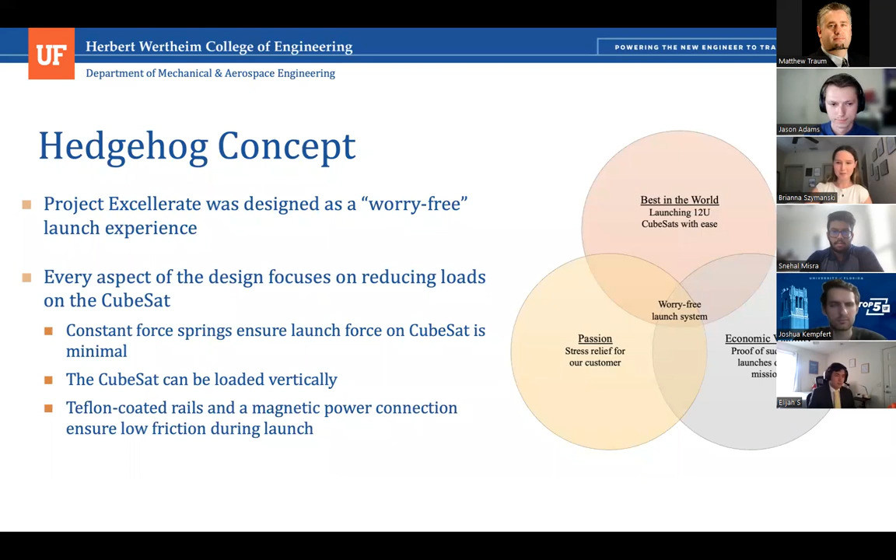Yeah, so a quick overview of our CSD. Our CSD houses a 12U CubeSat, utilizes a custom power and communication system to connect to ground, and also has our unique worry-free loading and launch mechanism. Right now, the overall mass of the system is just about 5 kilograms, a little bit under that.

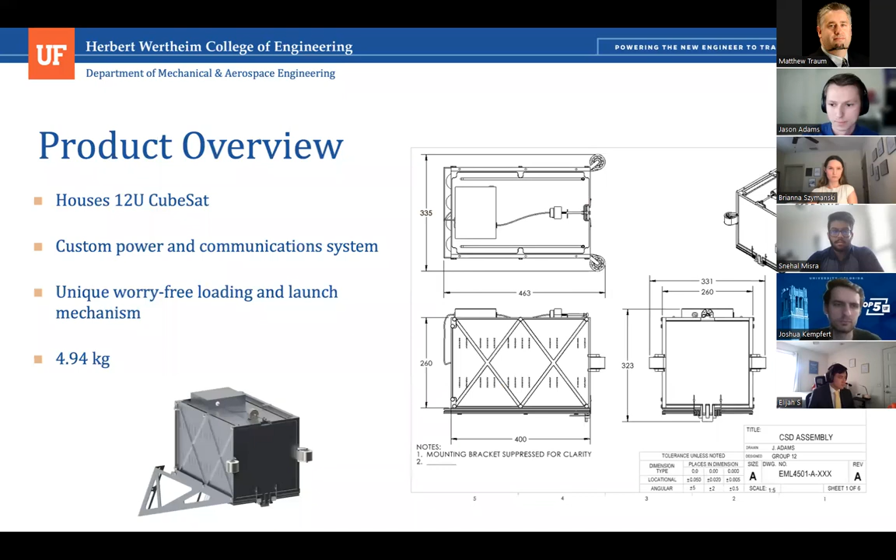So our housing, like I said, fits a 12U CubeSat. It's comprised of 5 plates of 7075 T6 aluminum. The housing's overall mass is about 2.5 kilograms, about half the mass of the entire CSD, and also accounts for liftoff and ascent venting to ensure that there aren't any extreme pressure differentials that can damage the CubeSat during launch.

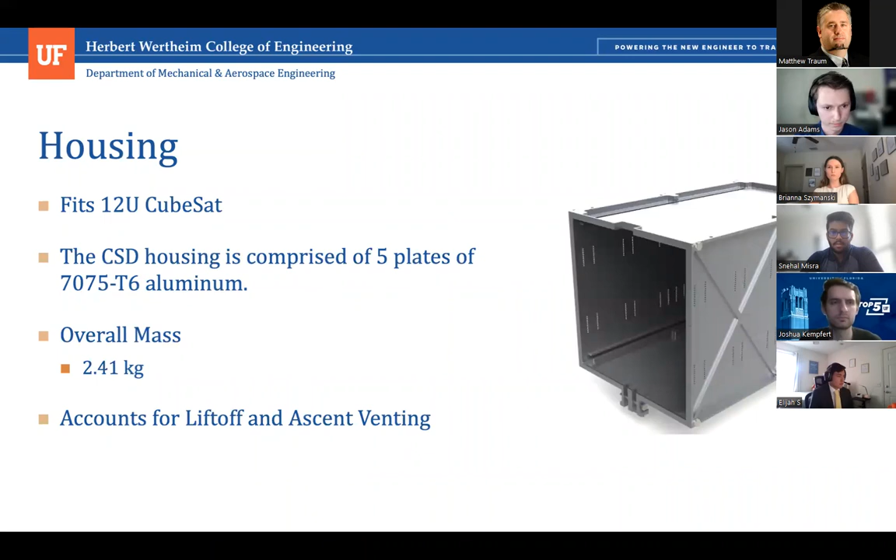Like I mentioned, we chose 7075 T6 aluminum for our housing, mostly for its high specific strength. 7075 is one of the highest publicly available alloys of aluminum. But when putting that next to other metals like titanium, magnesium, its cost is very, very low. And when putting that next to other materials with high specific properties like composites, carbon fiber...

The manufacturing machinability is huge, it's so much simpler. Additionally, aluminum is electrically and thermally conductive, so we can ground all of our electronics to it. And aluminum is corrosion resistant and has low outgassing.

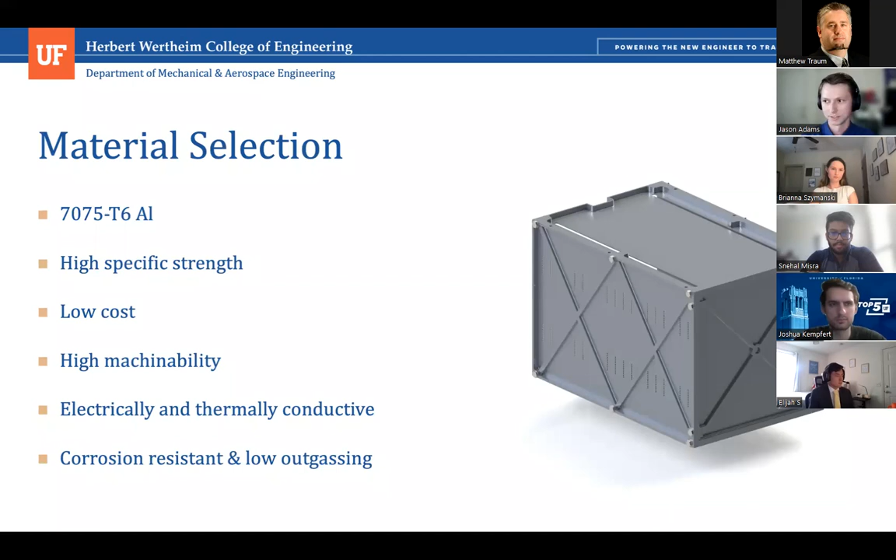As far as manufacturing goes, aluminum is very machinable. The way we intend to make our housing is by pocketing out plate stock of aluminum. This is low cost and easy to obtain. And we're going to pocket all of this out on a 3-axis CNC milling machine. Basically, what this does is allows us to cut our part count way down.

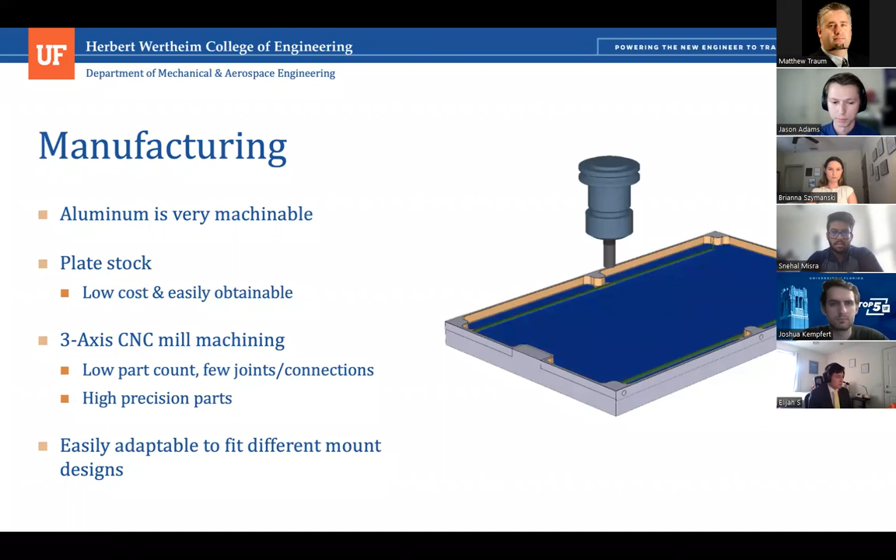So like I said, the entire housing is only 5 parts, 4 unique parts. And with that, we have fewer joints and connections, which are fewer potential points of failure. And again, since it's made on a CNC machine, we have high precision parts, which is very important for our launch mechanism. Additionally, it's easily adaptable to fit different mount designs for different launch vehicles or applications.

So we did a quick wall thickness analysis to try to figure out the minimum thickness of the wall we needed in order for our housing to withstand all of the structural loads primarily seen during launch and liftoff. We chose a factor of safety of 1.6 for this, and by doing that, we found that our minimum wall thickness is about 1 millimeter.

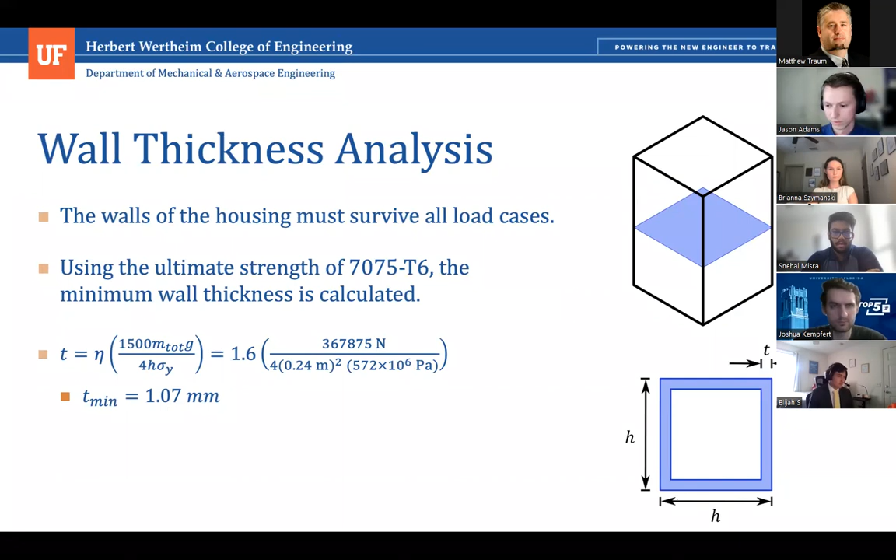Moving on to the mounting configuration, we actually employ somewhat of a unique system in that instead of hard mounting to the launch vehicle through bolts alone, we employ 2 silicone rubber shock isolators. This allows the shock to be applied without the aggressive shock loads during jettison being transmitted directly to the CSD. This also changes the natural frequency of the structure, so we achieve about 300 hertz, which is above the mandated 120 hertz, and it reduces our maximum predicted shock load from 4,000 G to 600 G. We'll show evidence in a minute for that.

And we utilize most of our extra mass here, so we use about 1.46 kilograms total.

So how we actually accomplish this is that NASA's Space Launch System provides a shock response spectrum at the payload adapter plates. This provides the peak shock acceleration for a hypothetical single degree of freedom system at that frequency. So as you can see here, if we lower our natural frequency, we will lower the effective shock load on the CSD and on the CubeSats, which is great. But we also have that 120 hertz limitation. And the effect of having these rubber isolators, as you can see here, is it makes the system behave as if it was a single degree of freedom mass spring system.

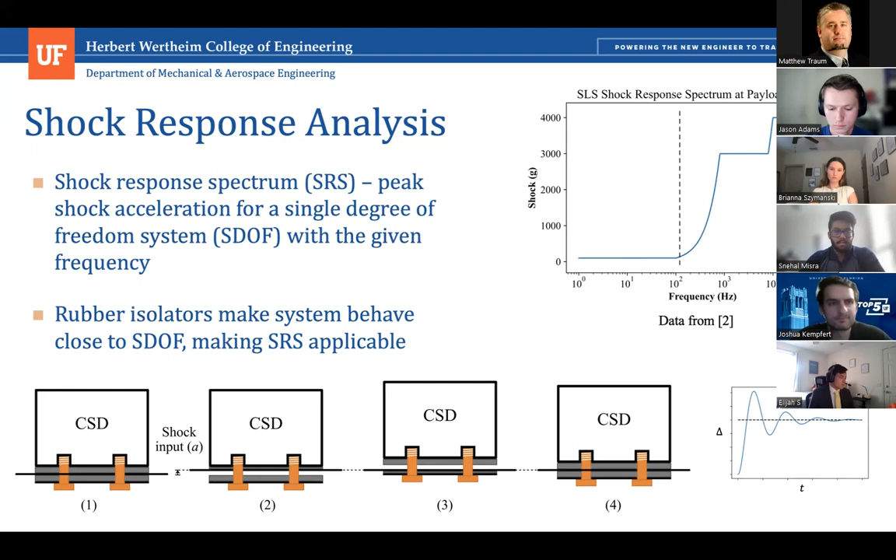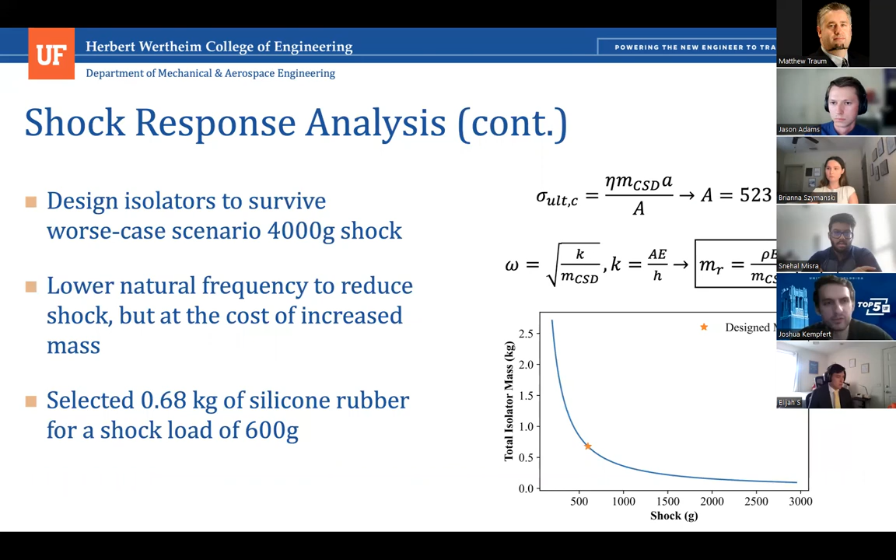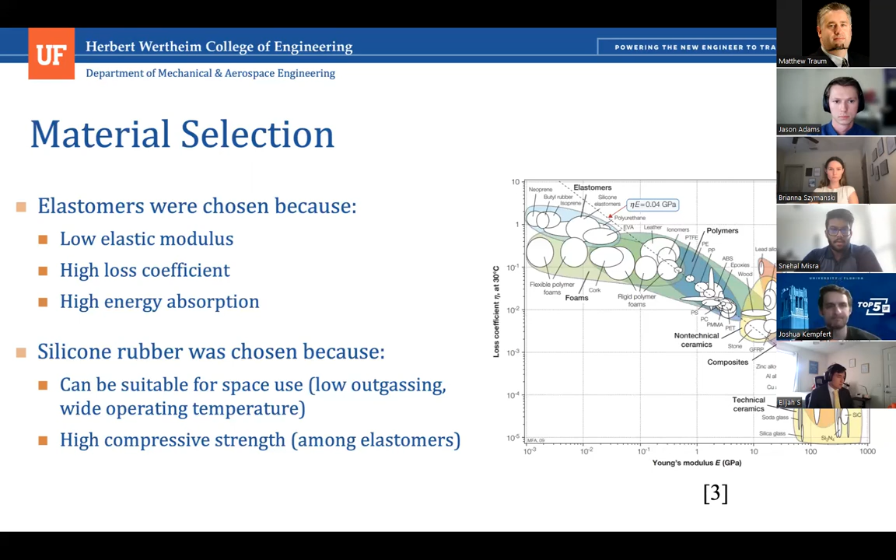So for performance requirements, we calculated we need an area of 523 centimeters squared minimum. We chose that in a 6 millimeter thickness, and we distributed this across the entire bottom surface of the CSD for even shock load. But since that area is not equal to 523 centimeters squared, we cut out holes to match our performance metric. For prototyping, we would probably just punch these out or cut it, since the tolerance doesn't need to be great. But for production, we would likely mold this to save some material waste.

Next, we're going to talk about the door mechanism. For our door, we are using torsion springs to open the door and a separation nut actuator, which holds the door in place until it is ready to open.

We are using a 270-degree torsion spring, but we are only using 180 degrees of that range. The total mass of this subsystem came out to be about 0.339 kilograms, with 0.234 kilograms accounting for the aluminum plate for the door, 0.057 kilograms accounting for the release actuator, and the rest from other small miscellaneous components.

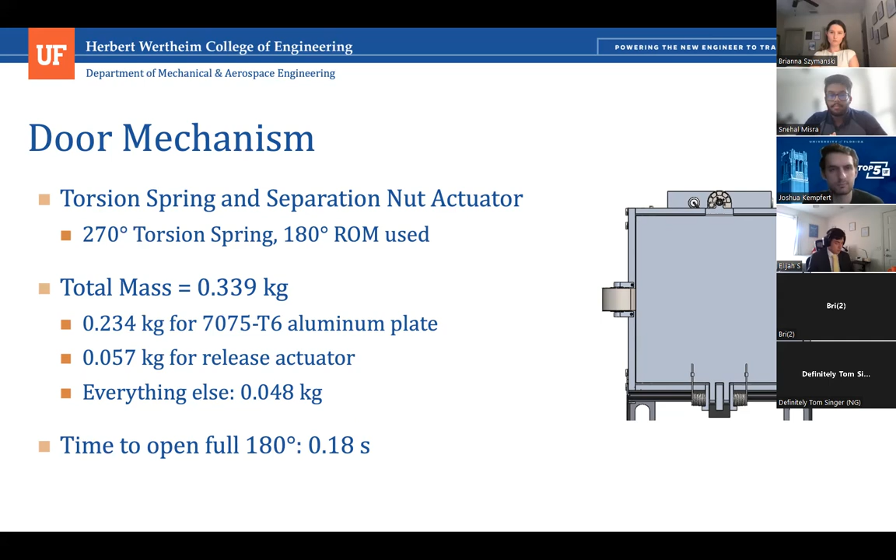The material selection for this section uses the same material as the outer housing for the door, which is 7075 aluminum, because of its high specific strength, machinability, and low cost. For the torsion spring, we used 304 stainless steel. When the door opens, it bumps against a silicone rubber pad, which absorbs the energy from the door opening, which we will expand on later.

We are using a space grade separation nut actuator, which is both mechanically and electrically redundant, with 6 kilonewtons of preload, and uses an M5 thread hole. The space actuator is sourced from Space Lock, so we know that it works in space.

For manufacturing, the door and the hinge are both going to be CNC machined, while the rest of the components listed are OTS parts. For the tabs holding together the torsion spring, as you can see in this picture, they will be welded on.

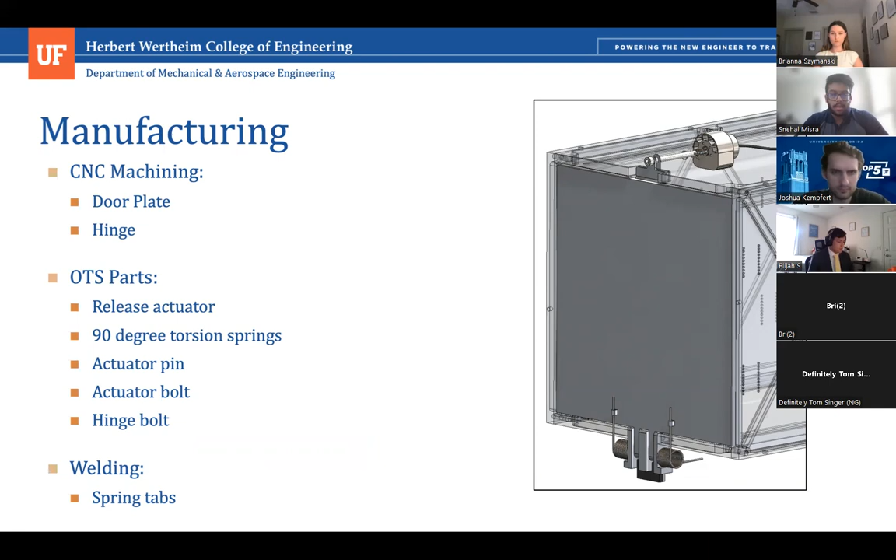There are a number of computations we perform to ensure the door functions properly. First, with the release, what we accomplish is the bolt slides out, and there's a little hole-like tab on the door which engages with the bolt. As the bolt slides out, the door slips through it.

An important consideration is ensuring we have a long enough bolt to allow this freedom of travel. Through some basic geometry, we calculated the minimum bolt travel length as 6.85 centimeters. But for a factor of safety, we chose a bolt with travel of 8 centimeters.

Another consideration is that the CubeSat is actually pressed up on the door prior to release by the constant force springs. But as the CubeSat launches, we felt it was imperative that the CubeSat not keep in contact with the door, mainly because there's friction and collisions happening that would make it a very unpredictable load path. So we designed this door such that it would swing fast enough that it never contacts the CubeSat after it initially breaks away from it.

We get our position of the CubeSat and the position of the edge of the door that would contact the CubeSat, and form some governing equations for that. What we can see from these equations is that lowering the height of the hinge is beneficial, in that the door does not need to rotate as fast to avoid the CubeSat. That's the reason why our hinge is actually somewhat offset on the bottom of the model.

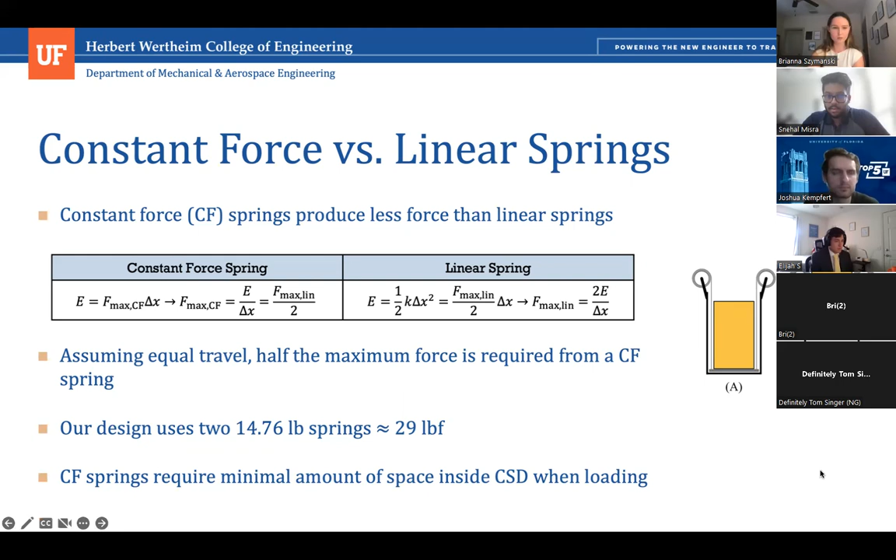Going through material selection quickly: the launch plate and spool mount. This is the launch plate right here. Spool mounts are both made out of different aluminum alloys due to their high specific strength and easy machinability. Our constant force springs are made of stainless steel, because we wanted them to be really corrosion resistant and have high strength. The spools that the springs rotate about are made of Teflon, again for low friction purposes.

To manufacture the launch plate, we would first water jet the main profile to get the geometry we want, then CNC the faces that go against those rails to finish the process. Our springs are off-the-shelf parts, and these mounts right here we would also machine using CNC machining.

The spools are right here, and we designed them to be intended to be 3D printed. You could also do injection molding, but that might be a higher cost. So we decided we want to do 3D printing if we were to do it, but you can do either.

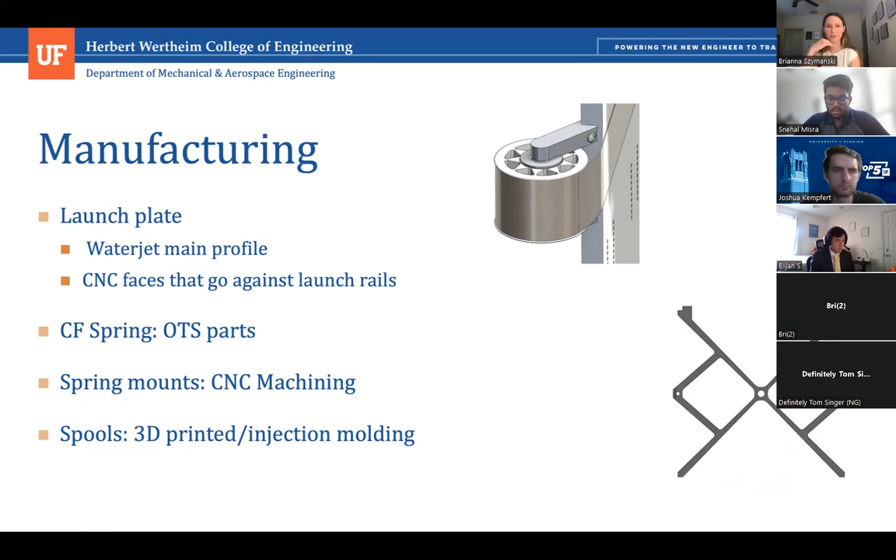An analysis that we did was the exit velocity analysis. One of our customer needs was that the exit velocity needed to be between 0.5 and 2 meters per second, so we did an energy balance equation for our math, as you can see right here. The highest energy loss we considered was from the spool turning and friction, accounting for about 5% of the energy loss, which was the most in comparison to everything else.

After we did all the math, this was the final equation that we got, which associates to this graph. Something I forgot to mention is that you can position it — I'll go back.

Right here, we have bolts that basically block the launch plate from going to a certain distance. So let's say you wanted to put the bolt here, the launch plate would only launch here. This provides adjustable velocity features for the mechanism.

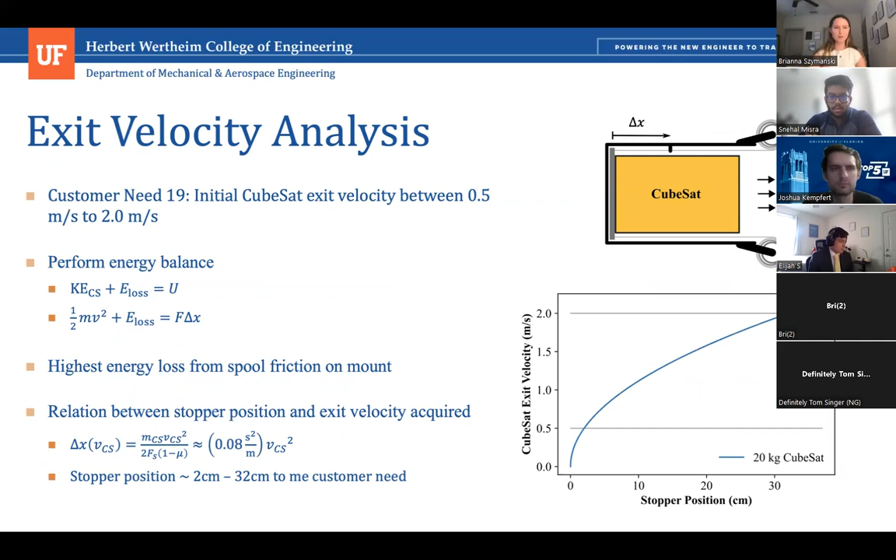So if you want it to be between 0.5 and 2 meters per second, you would have to put the bolt between 2 centimeters and approximately 32 centimeters to meet the customer needs. So it's very variable.

All right, I'm going to go over the communications and connection subsystem here. Our communications and connection subsystem receives 28-volt DC power from the launch vehicle. That's a given from our customer needs.

We're going to equip it with a microprocessor and an X-band radio transmitter that can receive commands from Earth to release the door actuator and launch the CubeSat. It also provides power to the CubeSat continuously up until the moment of launch through a magnetic connection, which ensures that through any bumps or vibrations in the launch, it stays engaged and power is continuously provided to the CubeSat.

For component selection, the communications and connections subsystem has a lot of off-the-shelf parts, but it's still important to look into the componentry here. There are some differences between a prototype model and an actual production model.

For the prototype, we've got our actual housing that's going to encase all of our electronics. It's a 6061 T6 aluminum alloy 16 gauge sheet housing. We chose this because it has low density, so it doesn't take up too much weight. It's affordable, easy to manufacture, and relatively strong for that weight.

Then we have our Raspberry Pi Zero microprocessor. We chose this because it's very small, affordable, and operates on 5 volts. These are actually space grade, which I didn't know, but people often send them up into CubeSats or low Earth orbit CubeSats as the main processor of their whole system.

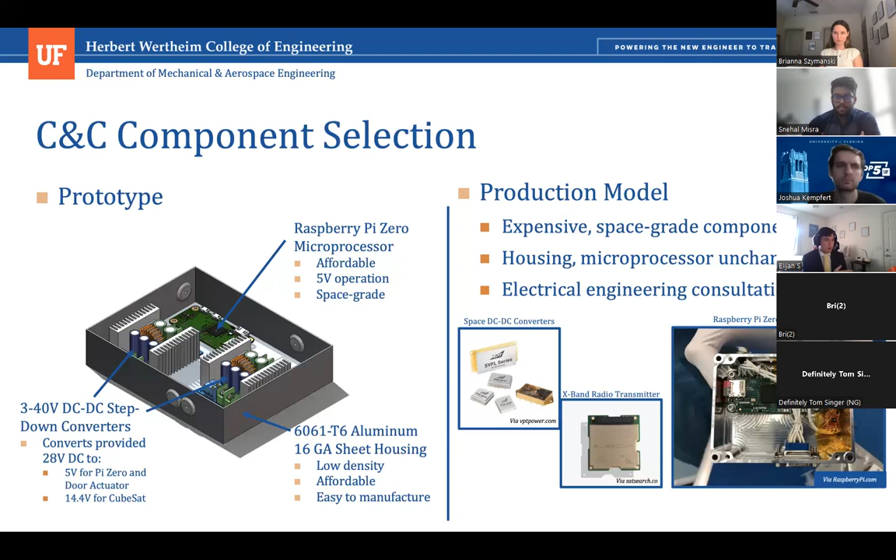For manufacturing and assembly, the communications box itself, which is that aluminum 6061 T6 sheet, the geometry and grommet holes can be cut by a CNC water jet. The communications box is probably going to be bonded to the housing with Loctite Hysol epoxy, along with the magnetic connector that can be bonded to the launch plate with that same epoxy.

All other components go within that communications box and they're off the shelf. The reason we chose this epoxy is it has high thermal resistance, low shrinkage, and it performs well in different environments - if there's any moisture or humidity, it's a good option.

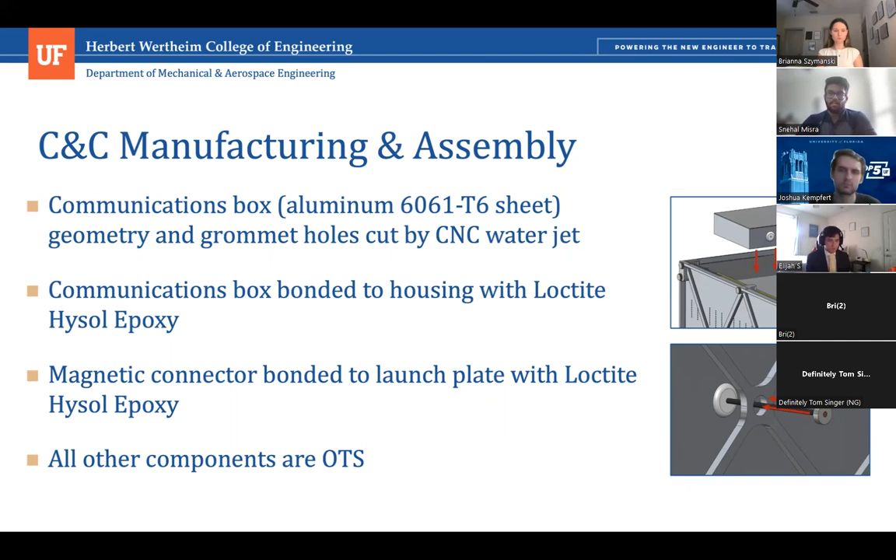Next, even if we have a pretty low force magnet, it's going to impart some sort of force onto the CubeSat during launch. So we wanted to try to figure out how to account for that.

There are identical ring magnets on both the CSD and the CubeSat that interact and connect, and the off-the-shelf maximum force is about 0.4 pound force. Because of this, when we have two magnets interacting, the magnetic force between them drops exponentially as they move further apart. We can describe this relationship, and we graphed it in the next slide.

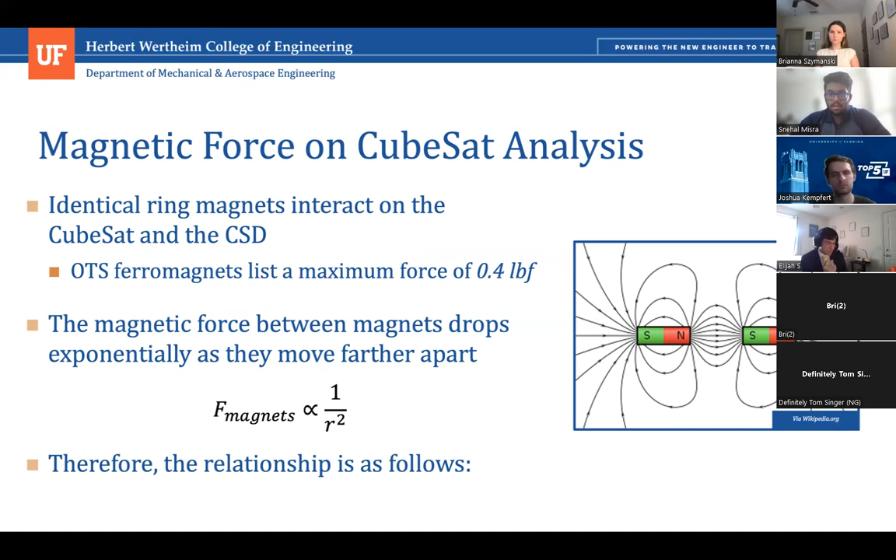Up until that moment of launch, it's going to be at its maximum magnetic force because those two magnets are in contact. Once that plate separates from the CubeSat, that magnetic force drops down exponentially pretty fast. We've graphed this here to show the relation and the break point.

Using this relation, we can correct our previous launch energy balance equations and find that the force this magnetic attraction exerts on the deployed CubeSat is pretty much negligible. I would love to do some more testing with it too if we're going to go into full production.

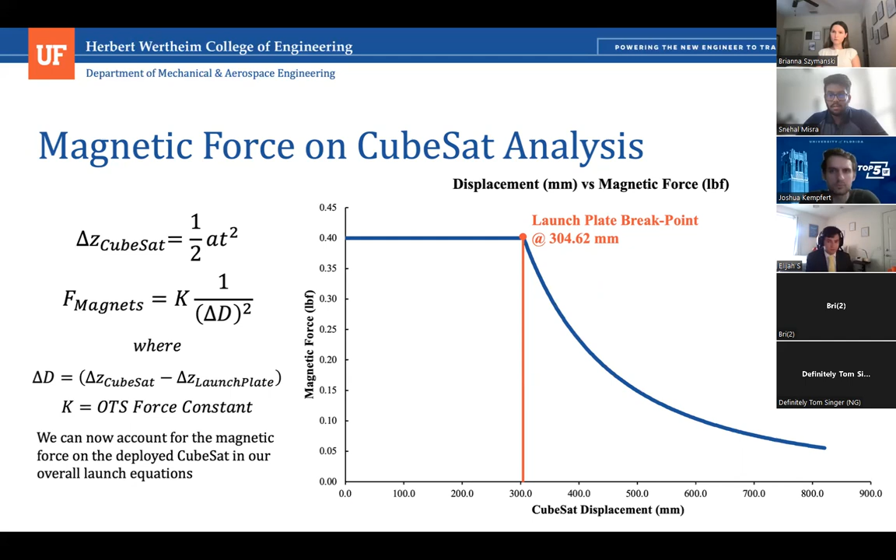Okay, next up, we're just going to kind of summarize some of the design highlights and key features.

First off, for that housing system, it's very low weight, just 2.41 kilograms. It's got a very small footprint because of those external constant force springs, only 26 by 40 centimeters. And it has holes that allow for ascent venting, making sure there's no pressure differentials.

For communications and connections, we use an X-band radio transmission system to communicate to Earth. And we have a magnetic connector to ensure that the CubeSat gets continuous power and that the connection is not broken.

For the launch system, we have constant force springs doing the heavy lifting, and we have an adjustable exit velocity with the sliding bolts there, and then a 0.66 g launch acceleration, which is really nice because it's a lot lower than if you were to use other spring systems.

Our door system uses a space grade release actuator, and the door opens to 180 degrees in just 0.18 seconds. And then our mounting system takes advantage of silicone rubber mounting pads to reduce maximum shock loads down to 600 Gs.

In this next slide, you can see the door open. During its opening process, the CubeSat gets expelled, and as the launch plate moves up, I've exploded out the magnetic connector so you can see more clearly. You can see the actuator bolt has a pin through it, which gets caught in that little tab, and that ensures that we don't shoot debris out into outer space.

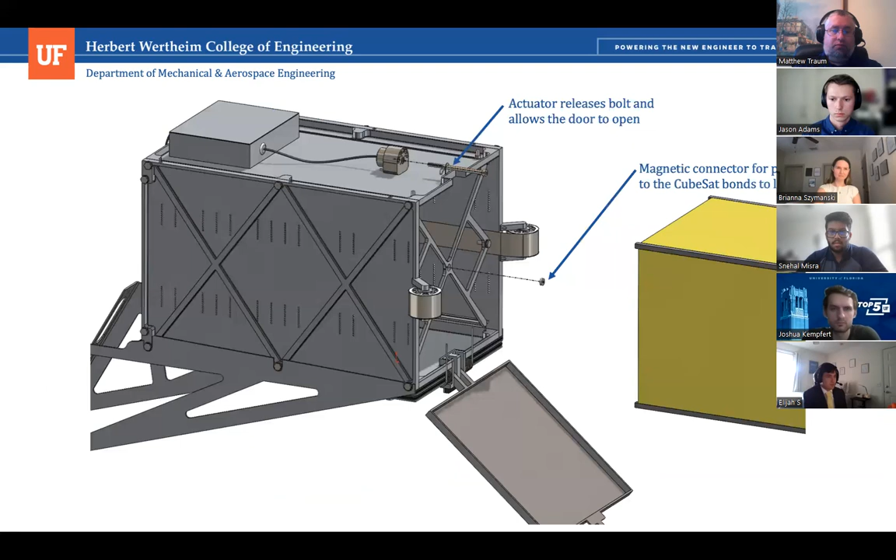Next, we're just going to quickly go over some costs for the prototype. Our raw material cost for the prototype was about $391. And then we have a breakdown of our labor costs for one prototype, with most of the time spent on assembly and fabrication, with the total incurred labor costs being about $3,000.

Next, we ran a quick energy calculation for the energy cost, assuming the average energy consumption for a commercial building. We assumed that our manufacturing building would have a square footage of 580 square feet. This gave us a monthly energy consumption along with our monthly energy demand, resulting in our total monthly energy costs of about $1,500. This brings our total cost of the prototype to about

$4,932. This cost is higher than the $500 because the $500 accounts for the raw materials, and this accounts for both the energy and the labor costs.

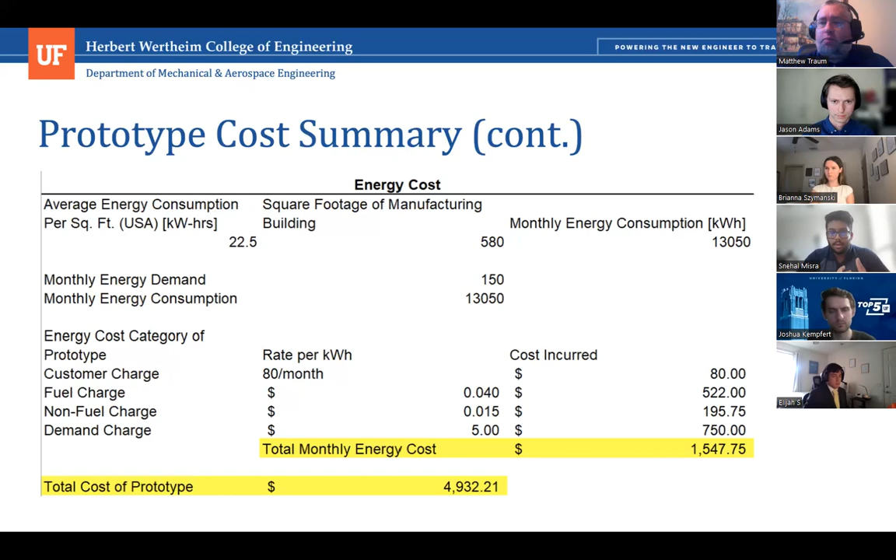Next, we have our production cost of a full scale 100 unit production run of the prototype, with the material costs being $39,000 and the labor costs increasing due to the number of hours and workers needed for producing the 100 units of the prototype, which brings our labor cost to about $300,000.

The same calculation was done for our energy costs, and this energy cost increases to about $146,000, which brings our total incurred cost to about $485,301, which is under our 500K budget.

For this cost, we would still need to do some market research to determine if this price is either too low or too high compared to other products on the market.

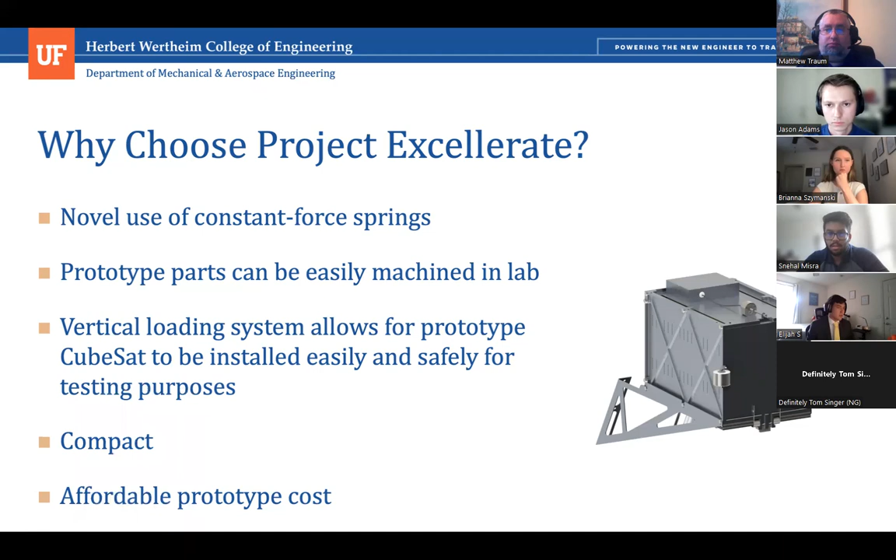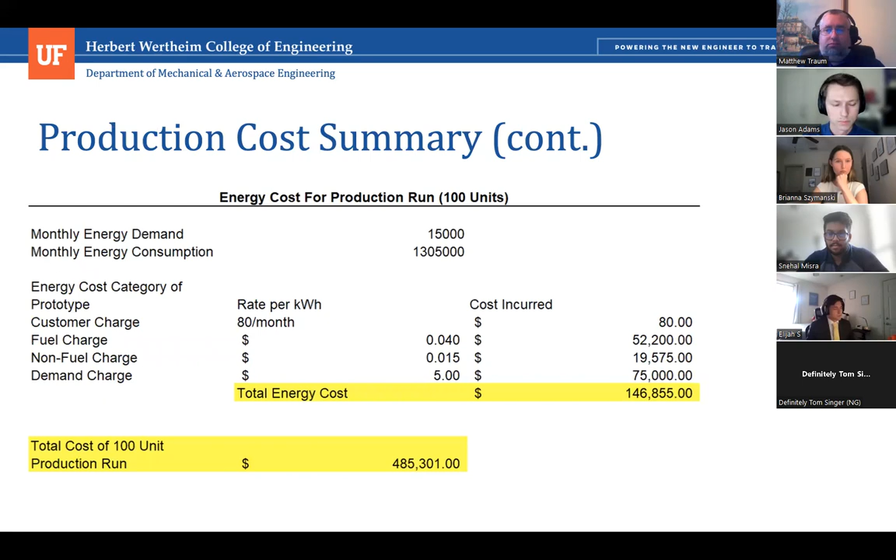Yeah, I agree with that. But looking at your manufacturing cost, it was pretty high, and I imagine a lot of that is coming from the time it takes to mill out each of those panels. I'm assuming that's showing up somewhere in your energy consumption too. Not to say one way is right or the other - I know in my line of work we definitely do the same thing, milling things out of thicker stock. For a low production count item, it may bias one way or the other. But that's something I'd like to see a little more explicit consideration on.

I think you guys did a really good job detailing your interface with the vehicle. Some other teams didn't put as much detail in their presentation about that as you did. But I didn't see a lot of interface with the CubeSat. I know you said you're going to squash that down and have it sprung up against the door, but as far as lateral constraint, I didn't see any discussion of that.

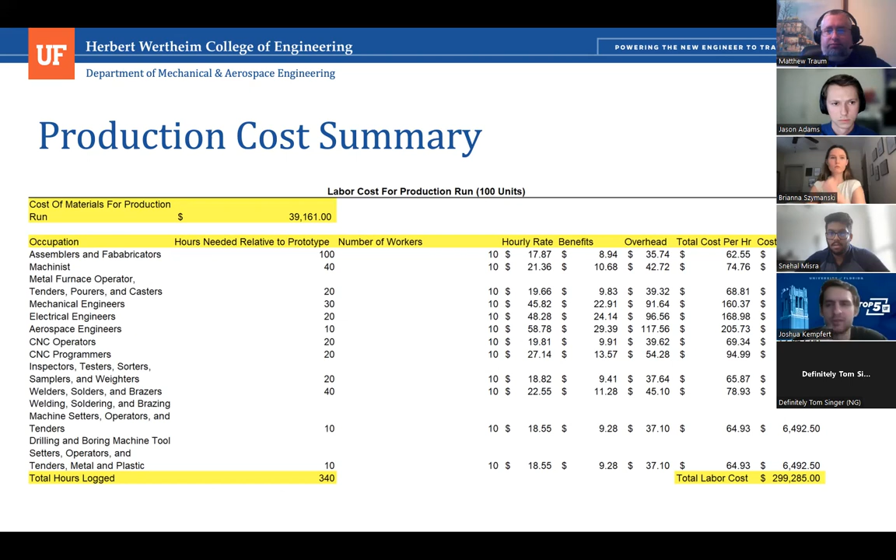Right, so our main concern was the 4000 G shock load that's typical during the separation of the stages of the rocket. It's correct that we didn't account largely for the lateral loads, but those are mostly structural. One we didn't show, which is in one of our extra analysis slides, is we did account for a 3G sustained lateral load we'd expect on the CubeSat, which would actually push up against the door even more. We performed an analysis to ensure that our door, even in worst case conditions with the entire weight times 3 of the CubeSats, wouldn't cause any yielding. But yeah, I'd agree that we don't have...

Can we back up a sec? I'm having a little trouble orienting myself. The ejection axis of your system - is that oriented axially on a rocket, or is it oriented radially on a rocket? Yeah, it would be radially. Sorry, we didn't make that clear.

Okay, so a vertical acceleration of the rocket is going to induce, for your system, a lateral load on the satellite. Yeah, correct, but we have the shock - that's why we positioned the shock isolation system there. Okay, but yeah, at least for the sustained acceleration.

Okay, that's correct. I'm interested in how that satellite is physically attached to or held into your housing. Is it essentially just sitting loose in there, relying on friction between the door and the satellite, and on the other end the pusher plate and the satellite to hold it in place, or is it locked in some way?

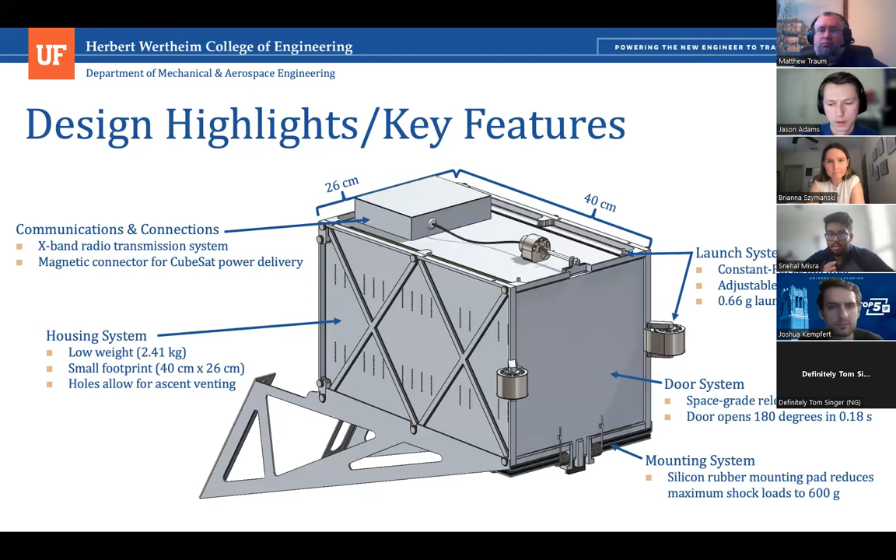It's locked in laterally using the rails that it sits on - those are super high tolerance or precision rails to be sure there's no slop there. Longitudinally, it's held in by the launch plate contacting stoppers that are adhered to the back facing plate of the housing. So it's really only constrained enough to where it's held in place until it needs to be launched out in that one direction. Okay.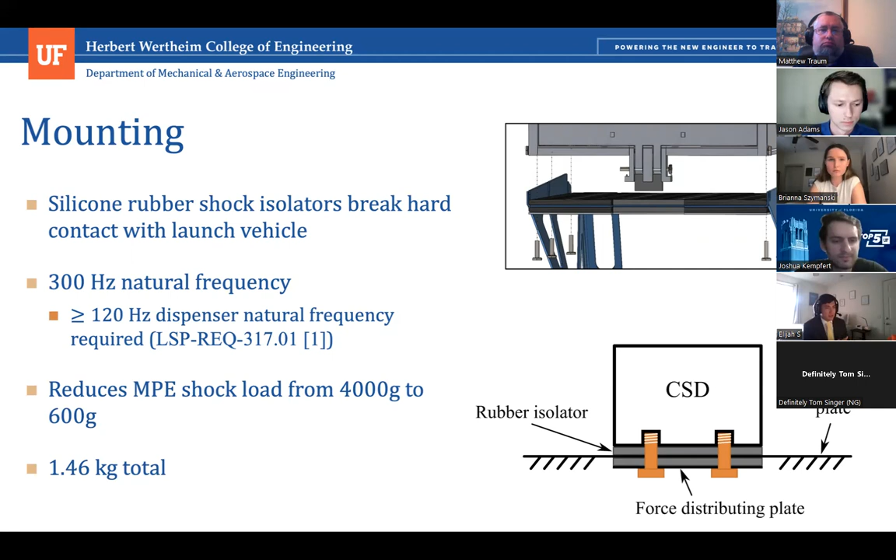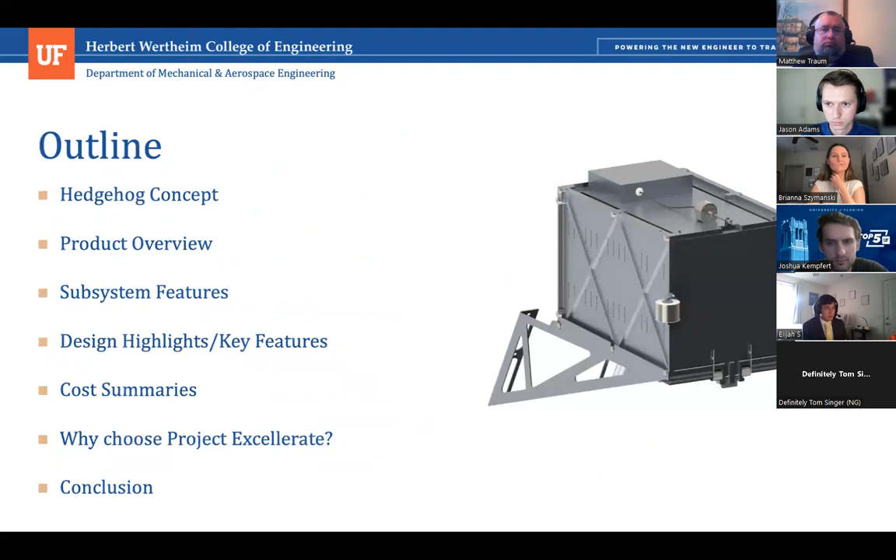I guess one consideration, just a quick caution - we could have put some of those rubber stoppers, like the ones on the back that catch the launch plate, on the door too, so the CubeSat isn't interacting directly with the door. That could have been a safety measure, but we didn't account for that.

Do you know if the CubeSats are designed for how they're restrained, or are they being designed to accommodate the way you're proposing they be restrained? Was there any sort of interface control over that?

Yeah, so the standard - I'm not sure we put the sketch in here - but we have a representative yellow model that represents the standard CubeSat design specifications for a 12U rail-based CubeSat. There's standardized dimensions and tolerances for the rails on the sides of the CubeSats and the overall dimensions.

That's one part of the interface, but another part is how the loads get into the satellite. If this thing's being shaken around a little bit, you don't want to load it in a way it's not designed to be loaded. So somebody's got to control the interface - either you, them, or the customer integrating all this has to define what that interface looks like. I know other teams have designed doors that just get shoved out of the way as the CubeSat exits.

Dr. Traum and I had questioned in one of the other presentations, who's controlling that, who says that's okay to do? I know you guys are swinging the door open ahead of the satellite, but the door is still part of what's holding the satellite in place. Who is it that says that's an okay thing to do on any given CubeSat?

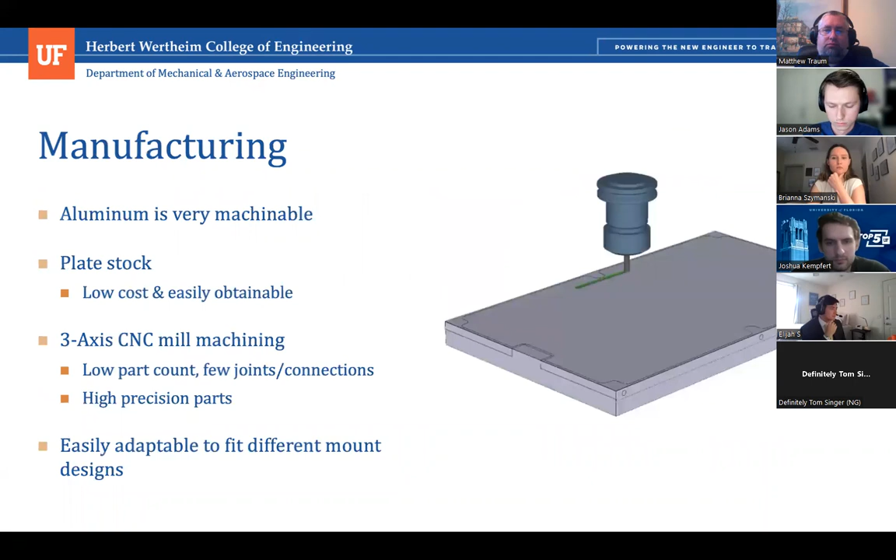What else do I have? Your Swiss cheese rubber deal that you've got sitting there, where is that physically located on your structure? Can you orient me - is that underneath the lateral, where the axial load on the rocket is?

Yeah, correct. Each of those rubber isolators is the exact same part.

The thing that maybe confuses me a little bit about this is you've got a lot of rubber under a not-stiff part of your structure, right? So the part in the middle of a panel isn't going to be particularly effective in resisting or damping any sort of motion because it's not going to be loaded. Does that make sense?

Yeah, that makes sense. We did consider adding ribs along the bottom of that to geometrically increase the stiffness of the center of the bottom panel there. The rails sort of... go ahead.

Yeah, I think you were going right down the right path. The rails are where the load is going to be introduced. If you were to stiffen the panel...

Of your dispenser, you still have to consider what's on the other side of that panel. So on your launch vehicle or whatever stage of the rocket you're mounted to, if there's nothing behind it on that side, then again the rubber's not going to do you any good no matter how stiff your panel is. So again, interface control, and knowing what you're attaching to is going to be important there.

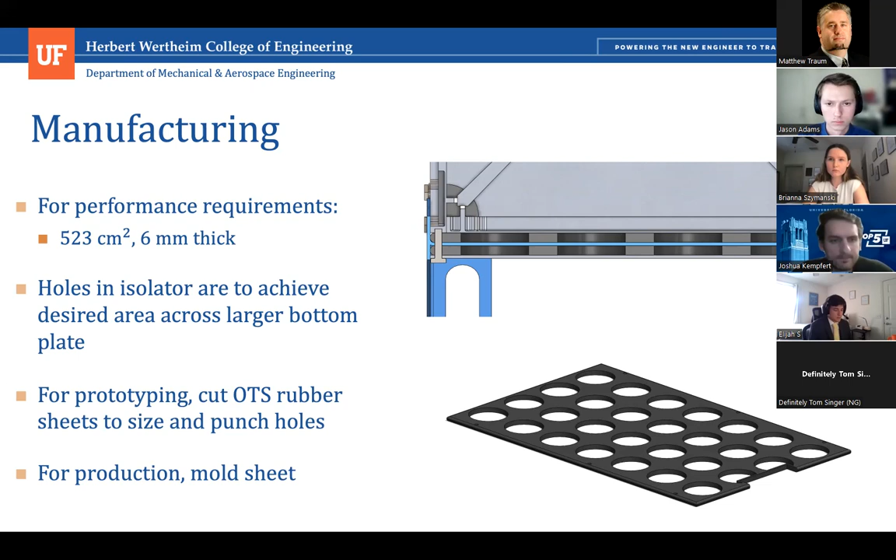Let's see, what else do I have? The springs that you've got here, the door hinge springs, and then also the ejection springs.

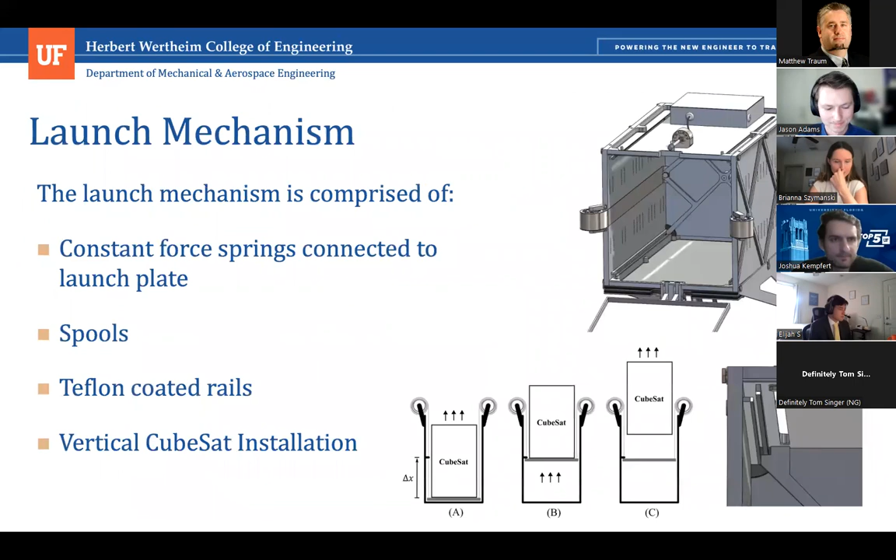I think you mentioned those were stainless steel. Do you have any concerns about cold welding in space with stainless steel?

I had a feeling you're going to ask about that. So there is a small clearance between the strip of the constant force spring and the side of the CSD. Additionally, that's not fully constrained against that surface, so it's sort of free to move around slightly.

All right, so that's stainless steel on an aluminum housing though, right? So that's probably not a cold weld concern. But as that spring rolls up, now you're going to have stainless steel on stainless steel, which is potentially a problem. I guess, is this intended to be reusable at all?

So at least for the NASA Space Launch System that our aerospace group requested we make this compatible with, for its lunar orbit mission this thing just essentially gets disposed of in space. So in that case it wouldn't be reusable, it's one and done. So as that thing rolls up, if it happens to attach itself to itself, you don't care. Correct. What about the door spring considerations?

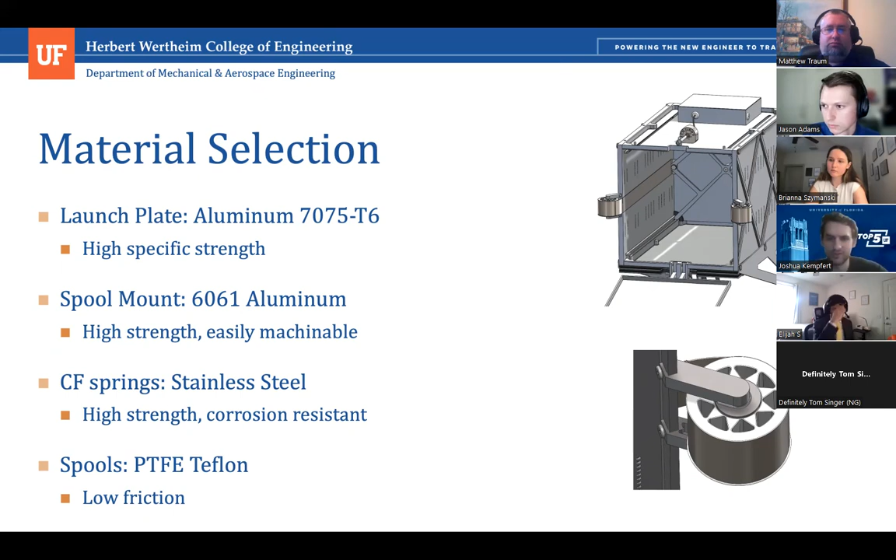I don't think that's something we thought to consider, unfortunately. It might be an issue, and I don't have a lot of experience with the space environment or with springs, and certainly not with springs in the space environment. But I know some types of stainless steel can be susceptible to cold welding, and if you've got a torsion spring like that where you don't have clearance between your coils, that might pose a problem. I think a material like A286 could solve that, but I'm not necessarily smart enough to say for sure.

Let's see, a couple other things. I wrote down a lot. Dr. Traum, if you want to jump in or cut me off because of time, let me know. No, you're okay, the next session starts at 3, so you've got 9 minutes. Oh, okay, oh man, okay.

You mentioned the door, as it springs open, it's going to hit a bumper, right? Correct. And I think you characterized the bounciness of that rubber material in some way. Right, yeah, the loss coefficient.

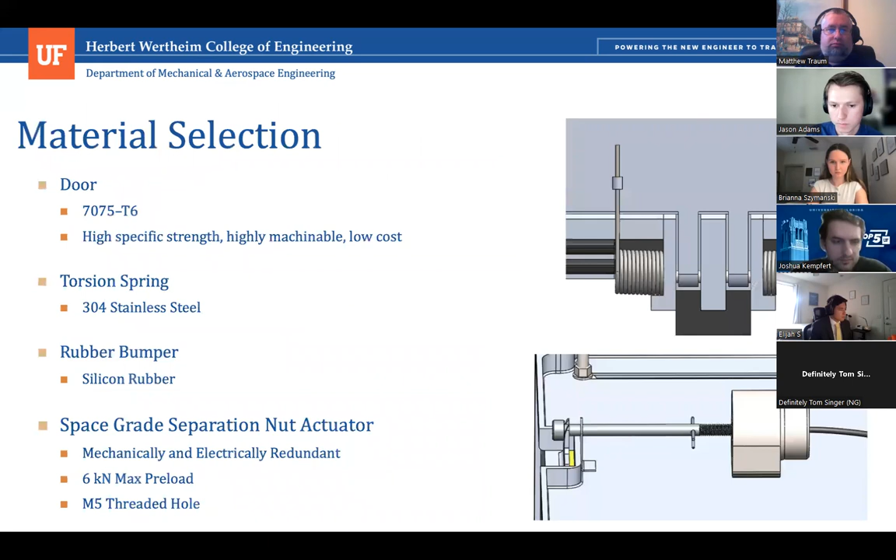Is that temperature dependent? Yeah, definitely, and that's one of the main reasons we recommend testing in this case, because at atmospheric conditions, loss coefficients approaching even 1, essentially all the energy lost in one cycle, are achievable. But we saw a general absence of data on loss coefficients specifically in the low temperature space environment. We were able to find that silicon rubber is used as an elastomer for shock isolation in space, but we were unable to find data on that, so that's something we probably need to look more into if this is going to be okay.

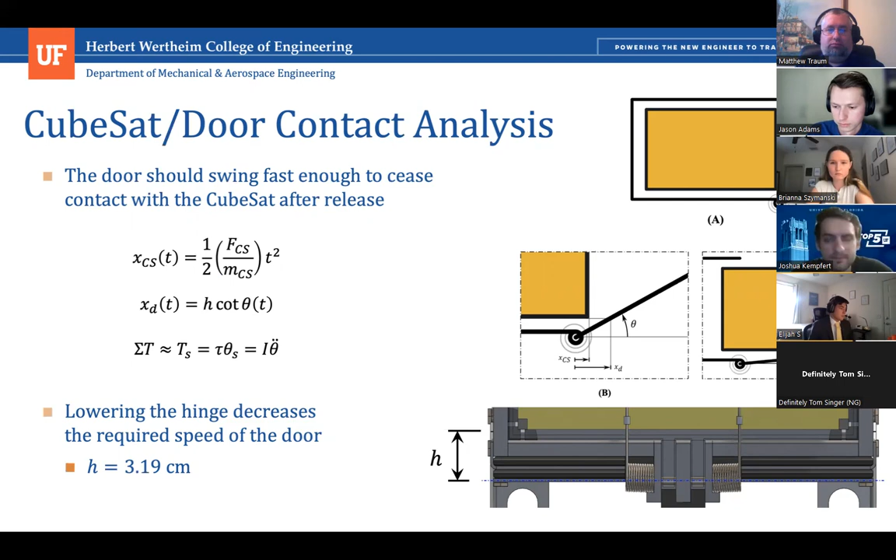Yeah, if you could go back one slide, I can clarify exactly what that's referring to. So that refers essentially to the edge of the door that would impact the CubeSat at any point in time. Okay, I think maybe that answers my question, because I was wondering why it looked like the door was accelerating faster and faster as it got further away from zero. And I think the answer is that the contact point is sliding up the door, and that's sort of driving that acceleration, not that the door itself is — right, exactly, maybe a weird thing to call acceleration, but yeah.

Can you go to the next slide, Bree? Yeah, if you look here, this is the actual door angle versus time. That makes it more clear. Okay, yeah, okay.

Let's see, what else do I have. I had written down, how are you going to load this thing, and then immediately as I was writing that down, I think Bree was talking about, oh, you just put the satellite in and gravity's enough to hold the extension spring. So that's clever, I like that, it's sort of a built-in feature of your system.

Maybe the question I have is, how is the orientation going to be vertical when it's being loaded, or is it possible there's going to be some integration activity on a launch pad where your container is mounted laterally? Yeah, so I suppose that's ultimately up to whoever's installing it, but even so, in the case it's lateral, they would only have to contend with about 30 pounds, which might require 2 people, I'd imagine, but it should still be safe.

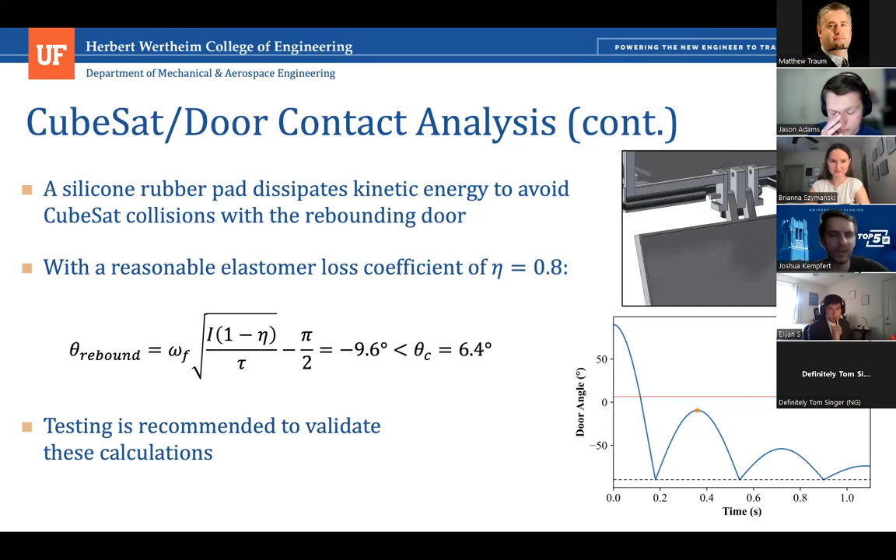I should note that we have the adjustable stopper for the launch plate. So one option is to use the stopper to essentially lock the launch plate all the way back while you're loading it, then put the CubeSat in, close the door, and then readjust the stopper. That's already built in, and doesn't require any change.

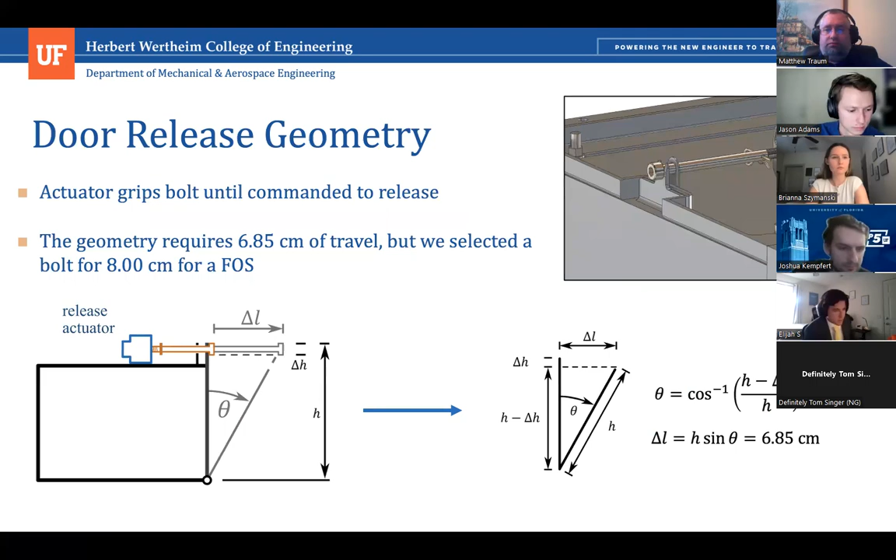How did you come to the decision to bond the communications box? That was mostly just an ease of installation, and also since there's such a large surface area on the bottom of that box, there's plenty of bond area between the two surfaces.

Also, to me, it seems like that's something you'd want to make modular, so if something's bad in the box, you'd be able to take the whole box off and swap it out relatively easily. Bonding kind of precludes being able to do that. Yeah, no, I definitely agree. In a revised or more final version of this, I hope the comms housing would be more like, you could get your hands in there and replace parts you need to, or just take the whole thing off. I agree with that.

And then on the communications connections, I think you were talking about a magnetic connection to the satellite. Yes. What prevents that from detaching during, say, a launch environment or a staging environment with high G loads?

I don't know if it matters that much, but in a theoretical sense, the launch plate is able to move with the CubeSat's mass during launch and all sorts of vibrations, plus that interaction of the two magnets connected to each other. I'd like to do some more testing of it, probably some pretty intense vibrational testing, but in theory I was hoping that would be enough to keep it in continuous contact. But you're right, that's probably a good thing to consider.

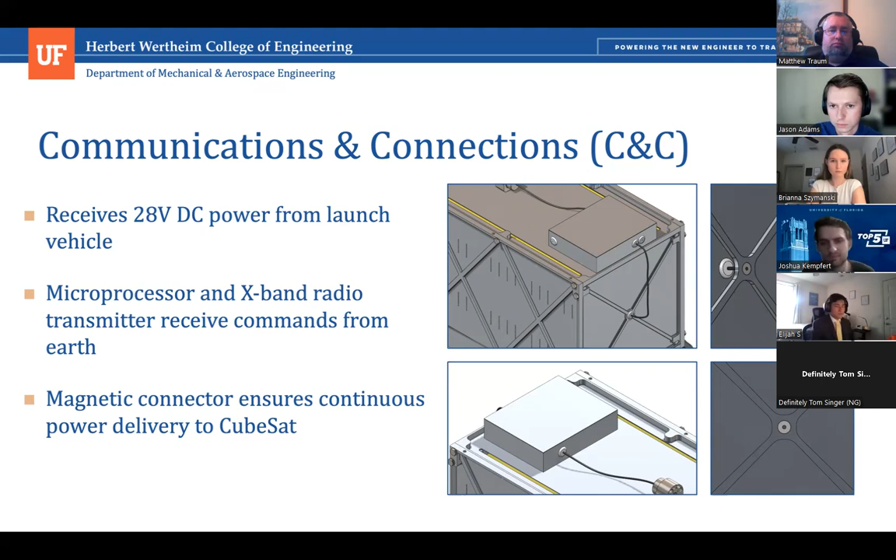What else did I have? The cost breakdown - you mentioned that your target cost for this is $500, but that's only a raw material cost. Yes, that is a raw material cost.

I'll say that's, at least from the groups I've heard, a novel interpretation of the cost requirement. Maybe you guys are right, and maybe some of the other teams missed the mark on that. Yeah, I forgot to mention, for our prototype we'll be using 6061 aluminum rather than the more expensive 7075. That's why our costs for the raw materials is so much lower.

There were other groups that said someone would be able to put one of these together in 3 minutes, and I didn't believe that. I don't know that I believe there's 10 hours of assembly and fabrication here either - I think it may be somewhere in the middle. I think it's an overestimation from using a method we're encouraged to use in our class, but if we could time ourselves assembling the prototype, I think we'd have a better estimate for the numbers here.

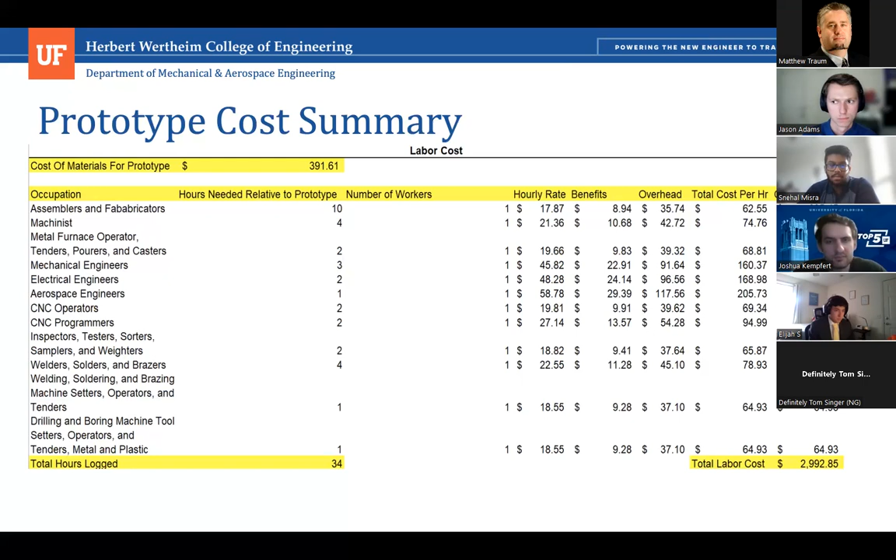This is just a theoretical breakdown of how much the labor costs would incur, with the different engineers - I could go into a bit of detail. For the mechanical engineers, they're just supervising the build process. The electrical engineer was for the communication system. And the aerospace engineer was our interface for the technical interchange meeting, where they told us their requirements and we would relay information through that one person with the aerospace team.